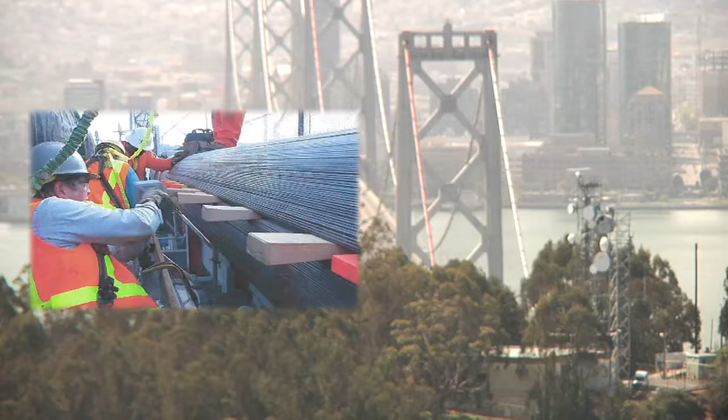The war on corrosion. It never ends on a bridge. On the 75-year-old west span, the main cables are periodically exposed to check for water damage. On the new Bay Bridge, the main cable is being armed from the beginning to fight a war that will last its lifetime.

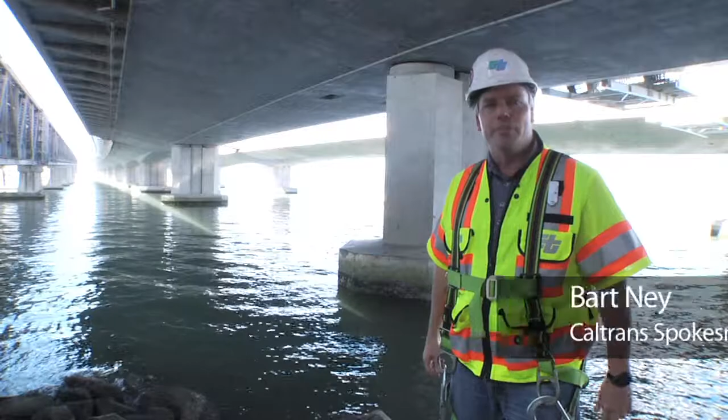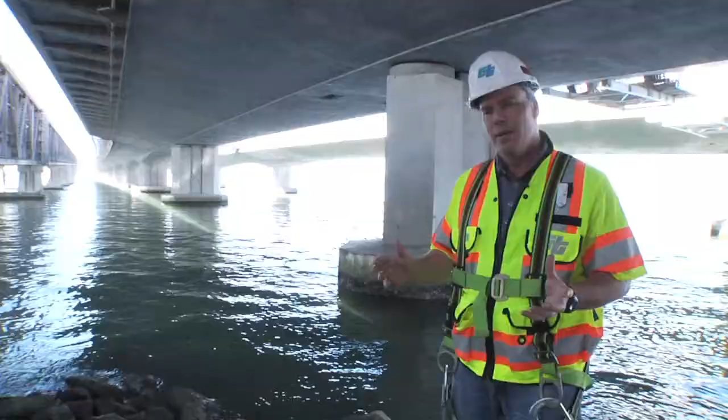I'm Bart Ney, your host, and this is the third in a trilogy of videos where we're looking at constructability challenges for the new Bay Bridge. In the first episode, we looked at concrete placement and how architects deal with challenges in doing massive concrete pours. In the second episode, we looked at steel post-tensioning and how we take post-tensioning ducts and run steel cables through them to give the bridge extra strength and lift.

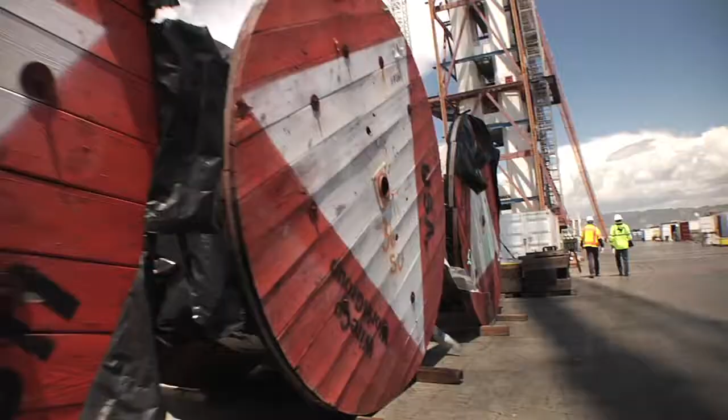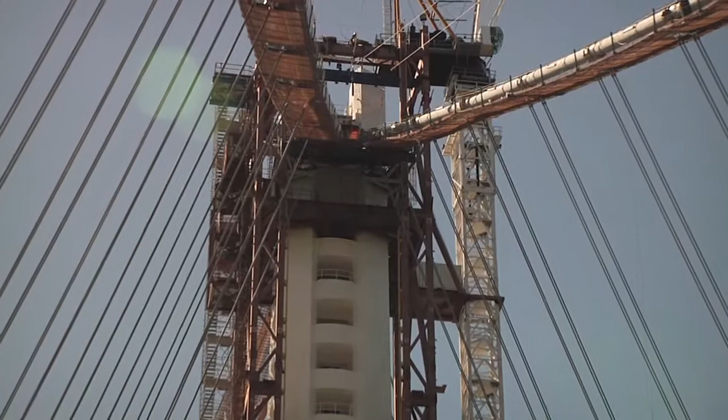In this episode, we're going to look at one of the biggest challenges to any steel bridge. Whether it's an all-steel bridge or one with steel inside of it, corrosion is a challenge that we face from the time we buy the steel all the way through the lifespan of the bridge. In today's episode, we're going to take you all the way to the top of the Bay Bridge self-anchored suspension bridge main tower, and look at our dehumidifiers and how we fight corrosion up there. And also deep inside the belly of the Skyway right above my head, where we'll look at some of the post-tensioning ducts there and how we dealt with corrosion challenges there. The war on corrosion, next on Bay Bridge 360.

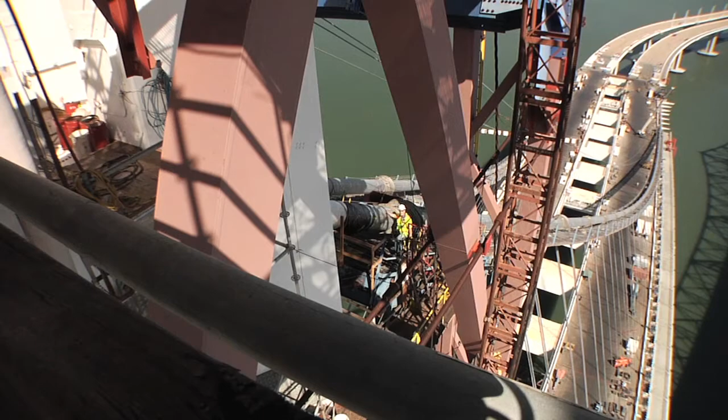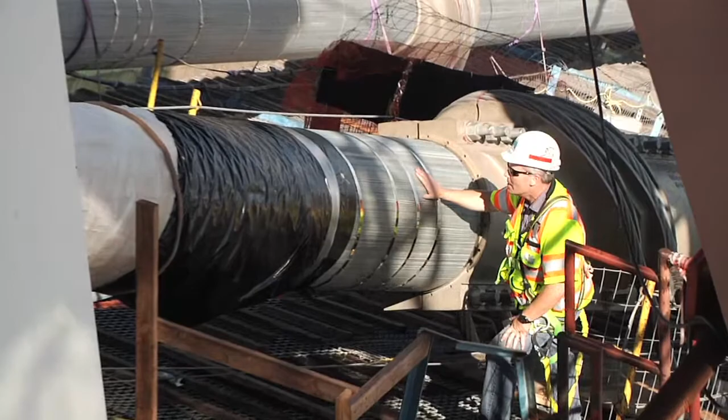Well, here we have our main cable, the real workhorse of this bridge. And it's made up of individual 5mm diameter wires, 17,399 of them. So it's critical that we protect this cable against any type of rust and corrosion. It starts with each individual wire. Each one of them is galvanized to protect against rust. And then after the bridge is completely put at its final position, we put weight on the suspender cables right here, we can begin the process of coating this cable with a zinc-based paste. We coat bay to bay between these individual cable bands all the way down the cable.

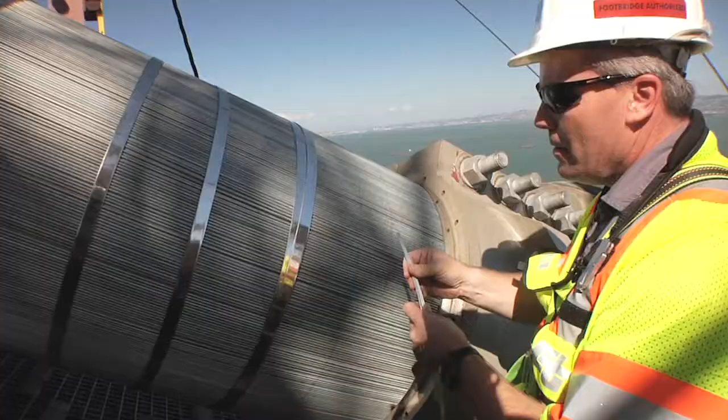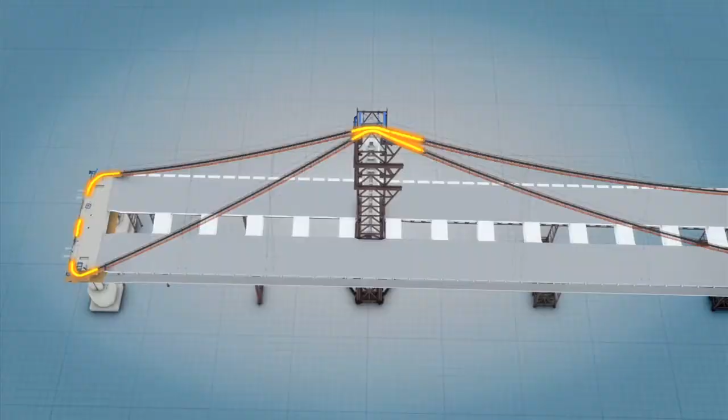And then on top of that, we have this, our S-wire wrap. Basically, the S-wire wrap is laid around the outside of the bridge. And this one actually has notches in it so that it interlocks and can slide directly in. So that wraps around the outside of the bridge like this, all the way bay to bay between these cable bands. And then on top of this S-wire wrap, we have two coats of a Noxide-based paint that almost form a gasket on the outside of this S-wire wrap. Two additional coats of paint are put on the outside of that.

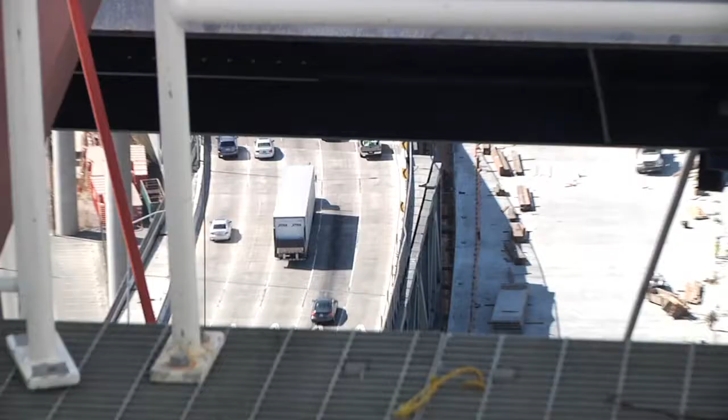Now there are some parts of the main cable though that don't have this S-wire wrap, like the very top of the bridge. Well, we made it. We're 525 feet in the air at the very top of the world's largest self-anchored suspension bridge, and underneath my feet is the main cable saddle. The main cable, only one of them, comes up over the top of the bridge right here. It goes down, loops around the back end of the bridge, comes back up, and crosses here again.

So this area right here is an area where we really have to watch corrosion with that cable going over it twice. And at this point, we don't have the wire wrap or the zinc-based paste. Everything's exposed. So what we do is we use dehumidifiers. Big, almost like air conditioning units that suck the moisture out of the air and out of the area where the steel is. Follow me, I'll show you.

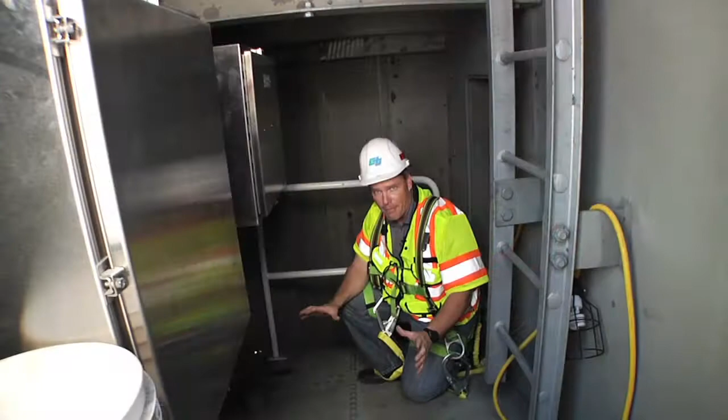All right, now I'm inside one of the tower legs, right above the main saddle for the main cable of the bridge. And you can see where I'm pointing down here, these holes have been cut into the chamber below where the main cable is. In that area, we don't have the wire wrapping around the outside of it.

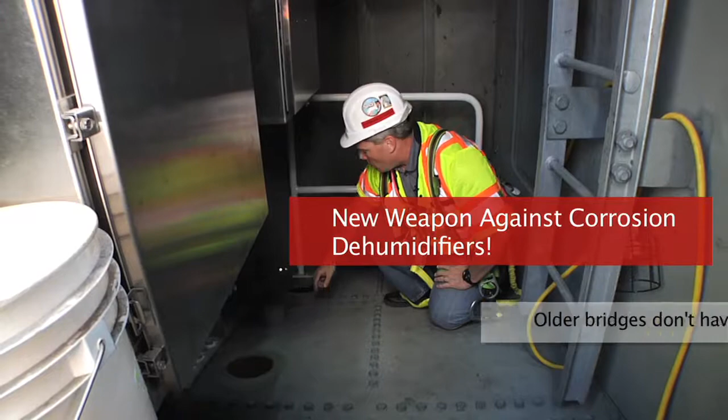So what we're going to do is dehumidify it, pull the moisture out. So these holes that you see here will have ducts that connect into the dehumidifier unit above my head. And on one end, we'll be sucking the moisture out of that chamber. And on the other end, the return supply will be pumping dry air in. So we always keep that area really dry, and we can fight corrosion that way.

Well, that is one area where we use a dehumidifier to take care of potential corrosion issues. There are actually a total of 5 units that we use on this bridge. That one is the smallest one. We have 2 units on the eastern side of the bridge, one in each one of the anchor points where the cable splays out to keep it dry.

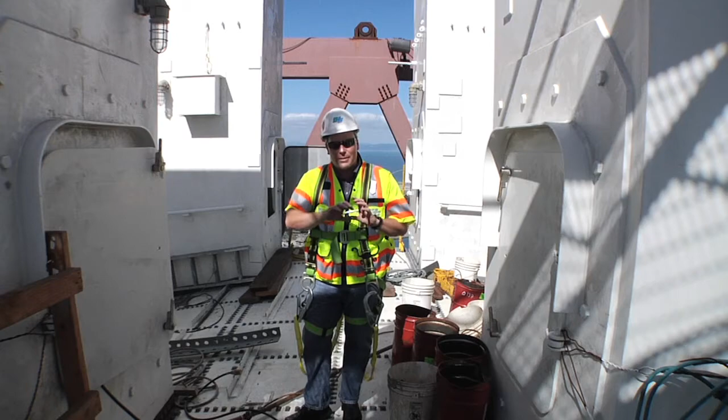Then we have another one 500 feet beneath my feet at the base of this tower, and one more at the very back end of the bridge where the cable wraps around. These are areas where we don't have the wire wrap anymore, and we just basically use the dehumidification system to make sure that we don't have a problem with corrosion.

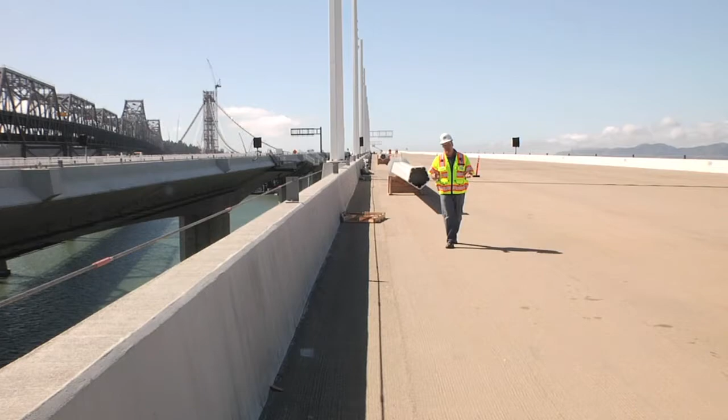Well, we've looked at a few of the ways that we prevent corrosion on our steel bridges and our steel components. But what happens when we actually encounter corrosion during construction? On the 1.2 mile long Skyway I'm walking on right now, we actually had that challenge. And at a public speaker series, one of our chief design engineers, Dr. Brian Maroney, discussed how we met that challenge.

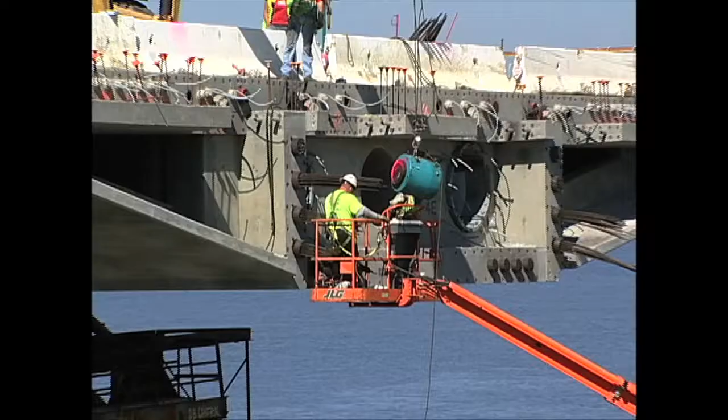This is a shot of the Skyway when it's cantilevered out. Now, cantilevered means it's basically only being supported on one end, and it wants to sag down. So what we do is we don't just take reinforcing steel, we bring in pre-stressing steel. That steel is 5 times stronger than regular steel.

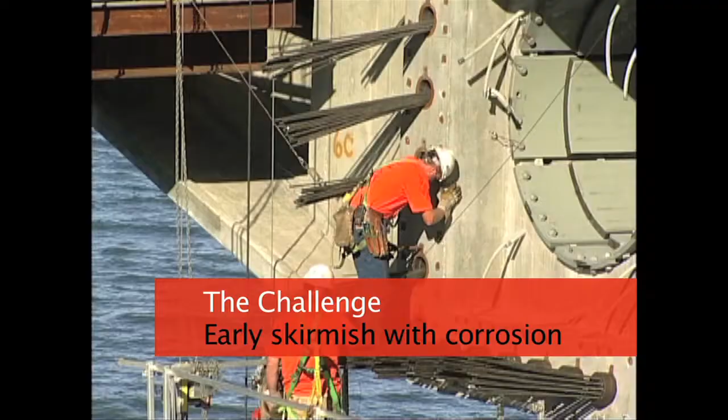Okay? Regular plate steel is like 50,000 pounds per square inch. Pre-stressing steel is 270,000 pounds per square inch. Okay? So it's really, really strong. Here's a challenge that we faced. There are 5,634 tendons in the Bay Bridge Skyway. With this many steel strands running through the bridge to give it strength, a constructability challenge presented itself.

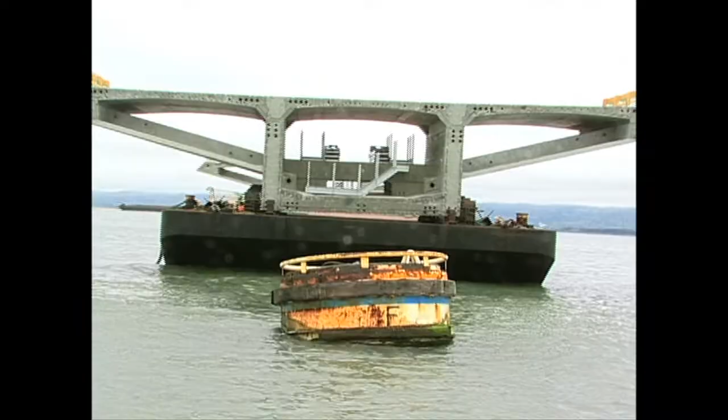Because the ducts were so close to each other, grout could cross from a tube being filled to an empty duct waiting for a strand and make that tube unusable. The only way to prevent this from happening on the Skyway was to allow some of the ducts to wait until the strands around them were placed before they were grouted.

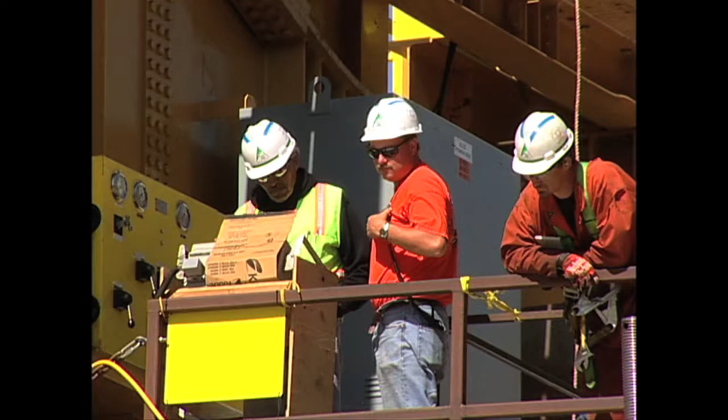In some cases, this is where rainwater was able to get into the unfilled ducts and cause the corrosion we found. Because the team had to knowingly leave the ducts open to address other constructability issues, we used a vapor phase inhibitor, which is a substance that helps reduce corrosion, to mitigate for the exposure. The bridge was designed and constructed with at least 10% extra tendons to assure that problems like this do not affect the bridge's performance.

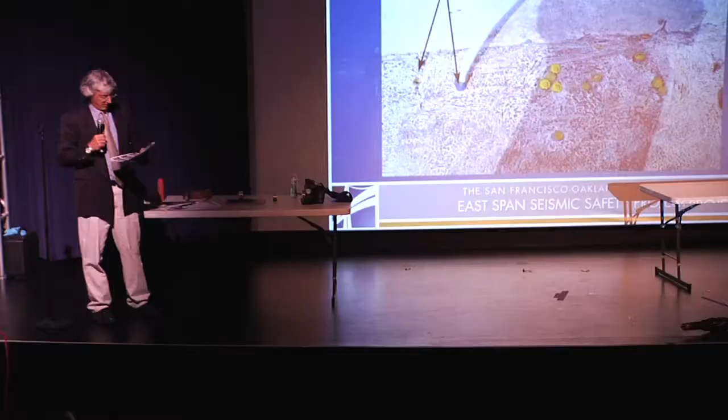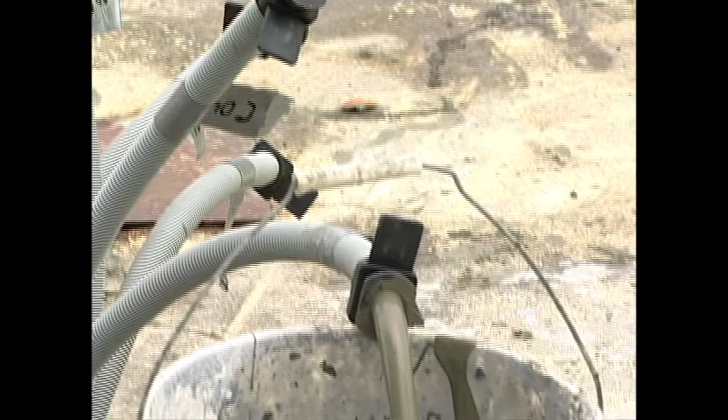I want to walk you through what we did. We found on the Skyway that there were some vents, grouting vents, that had broken off. We put high-strength grout inside those ducts to fill up all the voids. The tendons, the pre-stressing tendons, don't completely fill those ducts.

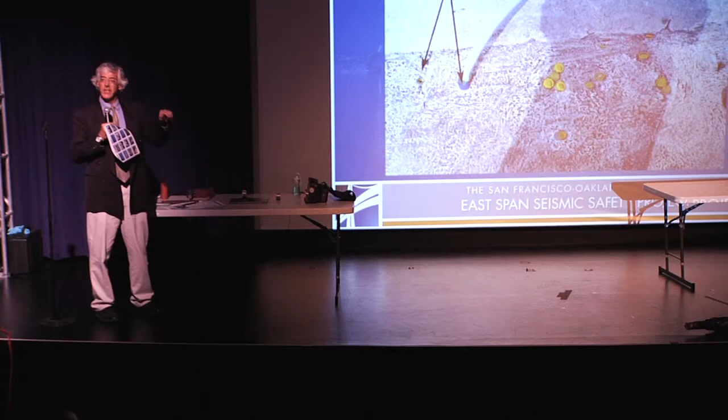So once we're done pre-stressing and erecting the structure and loading it up, we actually fill those ducts with grout. And we do it through the vents, but we also let the air out through those vents, but they need to be capped. What we found out was some trucks had probably run over them and they had broken off. And then when it rained, water got inside those ducts. Water and steel don't work very well.

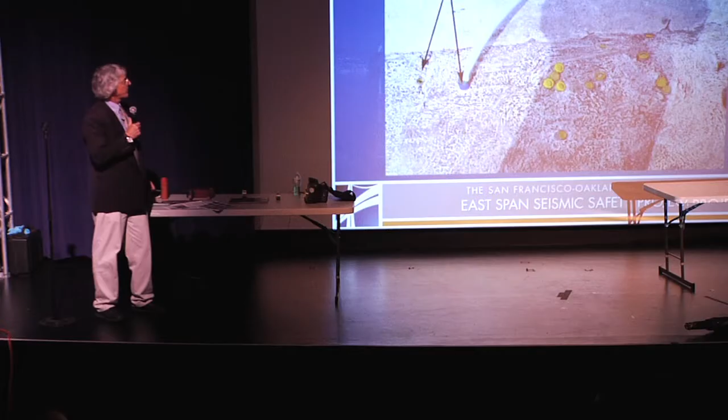Okay. Next slide. So as soon as we discovered this, the first thing we did is we put together a team. We brought together all the elements of a team that we needed to evaluate and figure out exactly what we needed to do.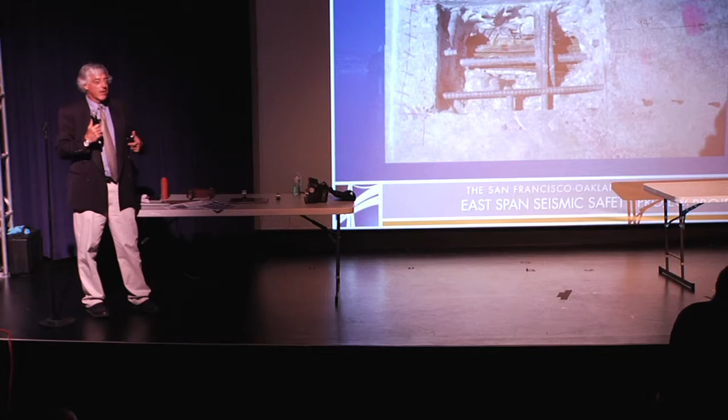First thing you have to do is get as smart as you possibly can about it. And what we did is we went to areas where we could get access to those. Kind of like if you have a problem with your knee, you're not going to want to open up your leg, you just want to open up a little hole. So what we did is we went to strategic locations where we knew we could get access to it. So here's a shot of an opening at the top of a deck.

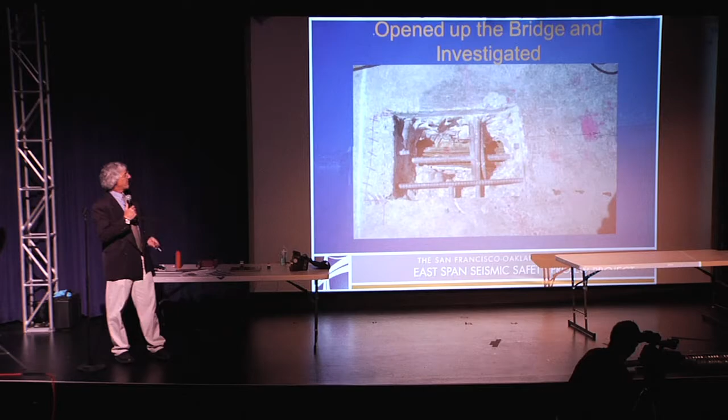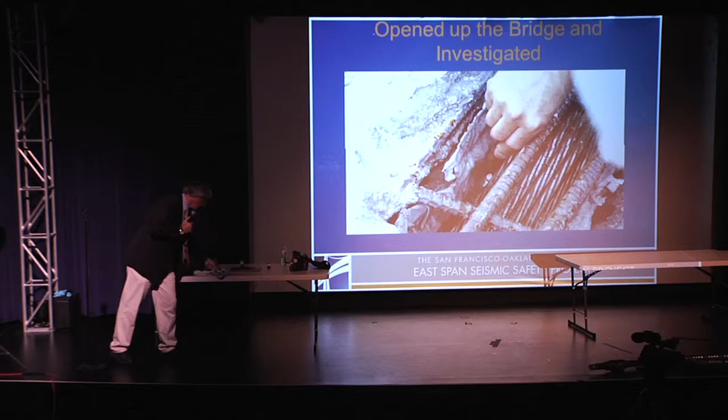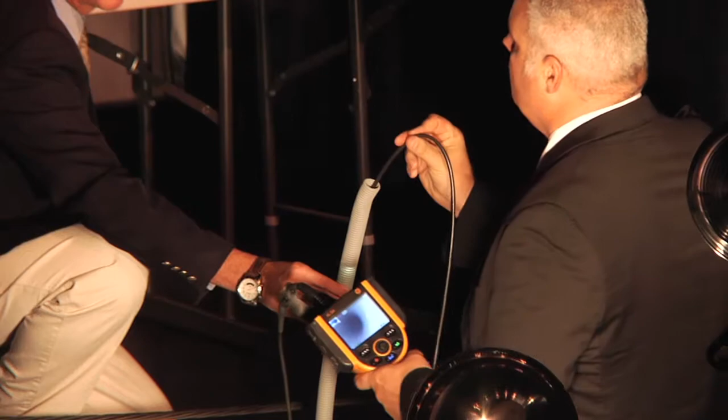Next slide. Now we're going to zoom in a little bit so you can actually see in this opening, you can see those pre-stressing strands, right? And what we did is we brought in new technology. What I have in my hand here is a digital borescope. So are you able to see inside that? So you can see the strand right down inside.

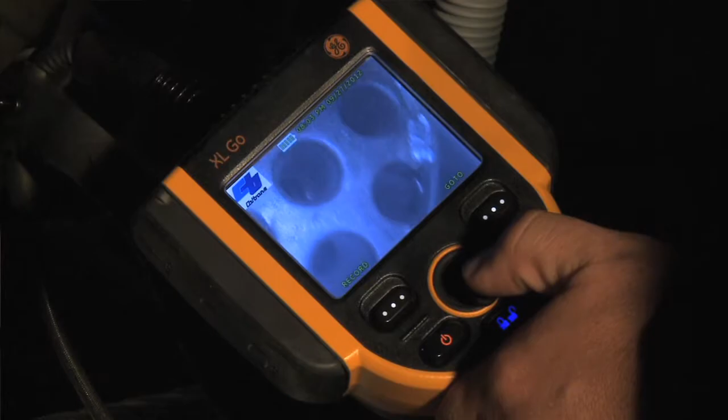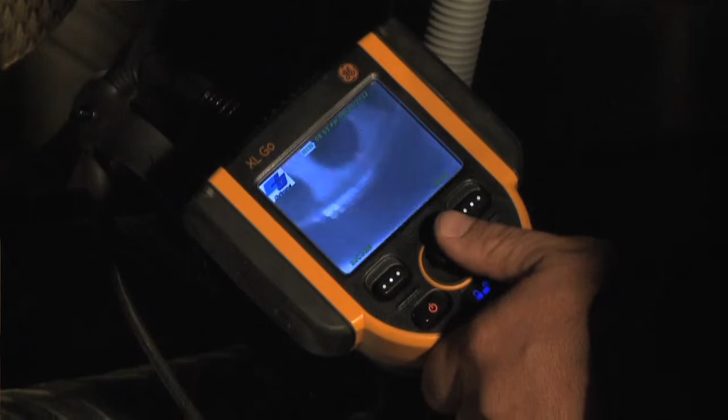I'm going to go ahead and articulate the camera head, and we're able to get down inside the tube now. And now we're going to go ahead and run it down. So my right is the direction that it's facing. You're able to see right down this tube. We can see the condition that the strand is in. We can see if there's anything in there, water, rust. And this was just fantastic.

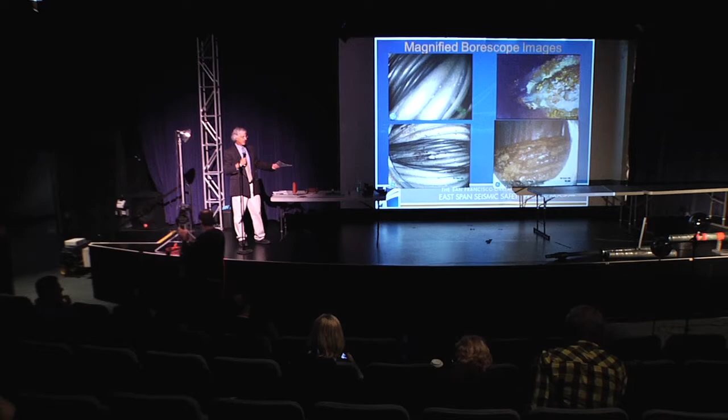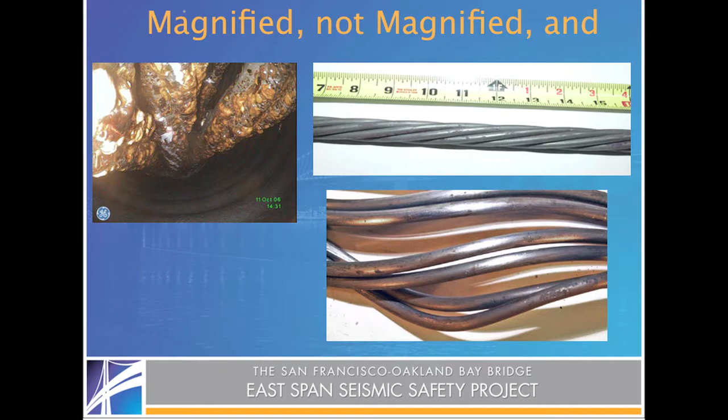And actually, Jason, if I remember right, when this was purchased, you were the first person in the United States at a DOT that had this equipment. Is that right? So, a first. This is from the borescope, and again, you look at it and you go, whoa, this is the same tendon when you lay it out and you just look at it without the magnification, right? And then this one, same tendon, it was cleaned up and kind of unspun, unwound, right? And this is what it looks like, okay? Next slide.

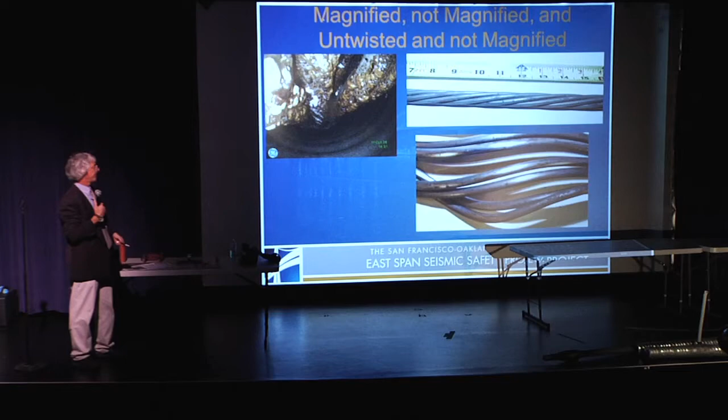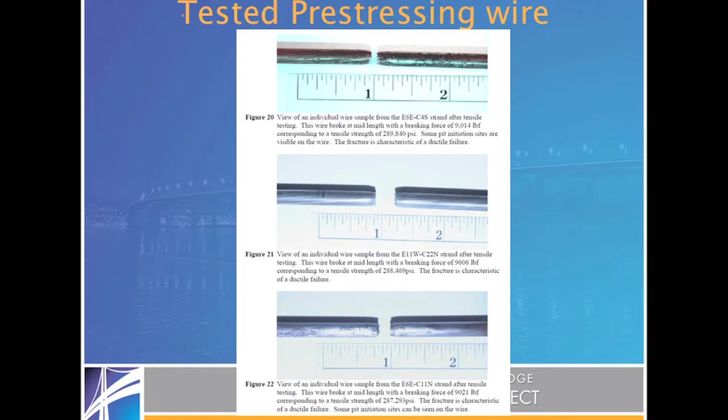Then we took some of those wires, because when we see pitting, that is a change of surface, we get concerned about stress concentrations. And in some cases, we said, get it out. Take it out, put in a new tendon. We also involved FHWA and their corrosion experts on the East Coast. And we actually also had the external independent peer review panel with Joe Nicoletti looking over our shoulders on this.

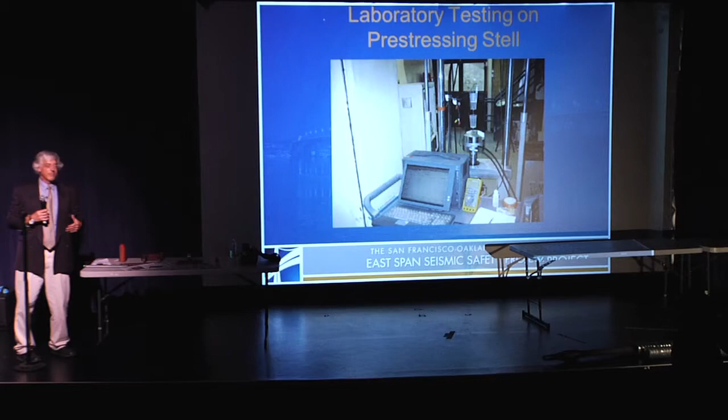And at the end, we had statistical information, strong engineering information, that something like 1.5% of the strands had what we termed moderate corrosion. That means we were losing about 5%, something like that, of their strength. What's the right balance? And we went through an evaluation of how much extra do we have, and we reviewed our calculations, and we had about 10% extra pre-stressing. So we got like 10% extra, and that's on top of code factors of safety and capacity reduction factors.

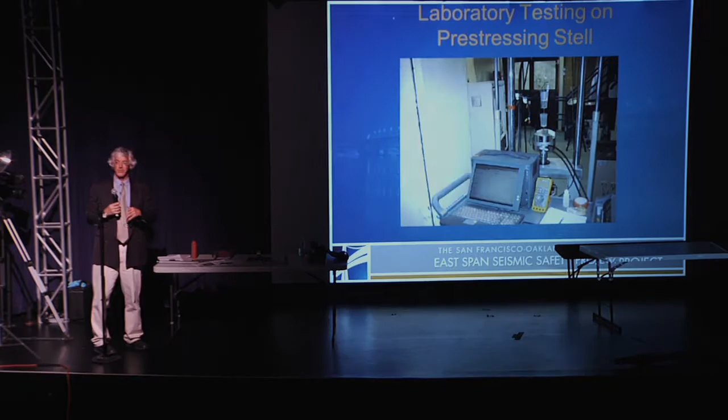This issue was thoroughly reviewed by Caltrans and external engineers during and after the time that improvements were being made. The Federal Highway Administration and the Toll Bridge Seismic Peer Review Panel both participated in the review. Results concluded that this did not and does not affect the safety of the bridge.

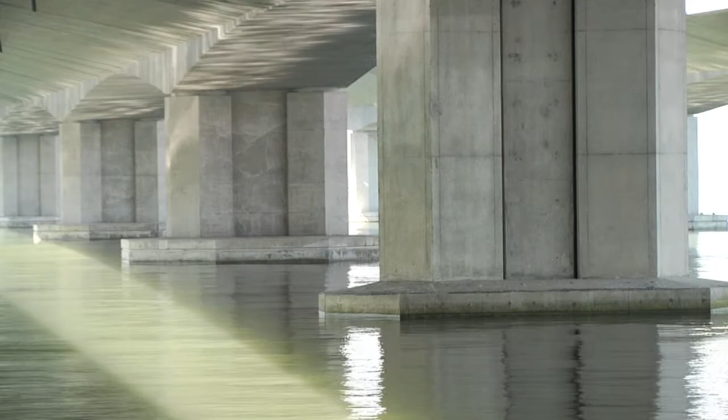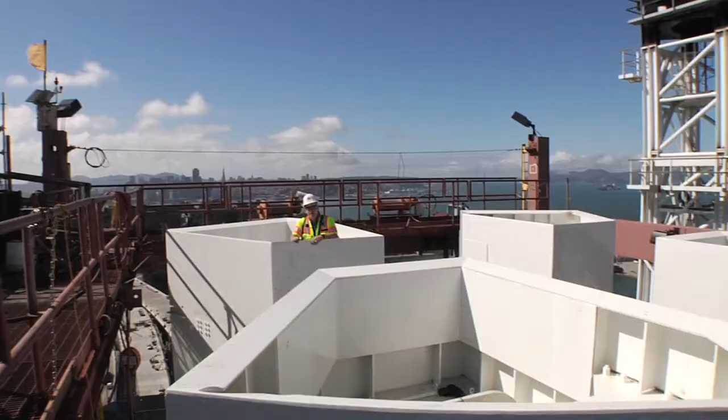All right. I've made my way back up to the top of the Bay Bridge, where we're ready to close out our episode on corrosion. Eternally vigilant is what we have to be to make sure that our bridges are up to spec and ready for the next earthquake. This is also the end of our trilogy of videos on constructability challenges that we've had with the Bay Bridge, but we still have a little ways to go. Got a little less than a year until we put this bridge into public service.